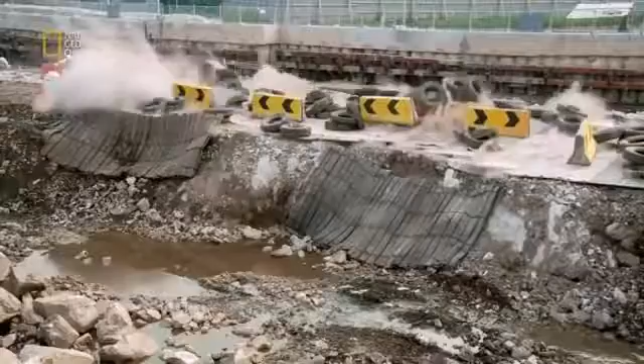Now there's an ambitious solution. A new transit system that will crisscross not only the city, but the entire region of Greater Kuala Lumpur. Huge machines will bore into Kuala Lumpur's treacherous bedrock to carve out almost 20 kilometers of tunnel.

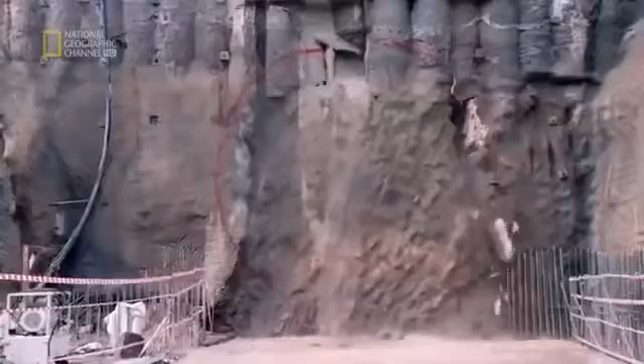Every day of construction, the engineers confront the perils of mechanical failure, fire, and collapse. Get it wrong and billions of dollars of investment could go to waste, and the streets of Kuala Lumpur and its pent-up economy will stay trapped in gridlock.

Kuala Lumpur is one of Asia's most vibrant cities. It's looking to compete with the region's Asian tiger economies. Its magnificent skyline testifies to its soaring ambition. But at street level, it's a different story. The city is blighted by severe congestion that threatens its future growth.

Over 7 million people live and work in the Kuala Lumpur region, the Klang Valley. Every day, they head into town in 4 million cars. As an alternative, a light rail transit system was built. But over time, it has been overwhelmed, and connections are inadequate.

Now there's a solution, a new mass rapid transit system that will reduce the pressure on traffic and unite far-flung parts of the city. For any modern metropolis to be vibrant, to be competitive, to be on par with some of the leading cities in the world, you've got to have a modern public transport system.

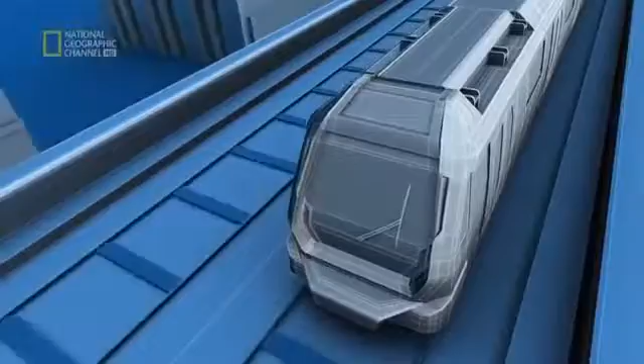The Klang Valley Mass Rapid Transit System, the KVMRT, is Kuala Lumpur's bid for greatness. 3 different routes comprising more than 150 kilometers of brand new lines. It will be seamless travel around the Klang Valley, especially the areas of high concentration population. And the first stage of the plan is the biggest test of all.

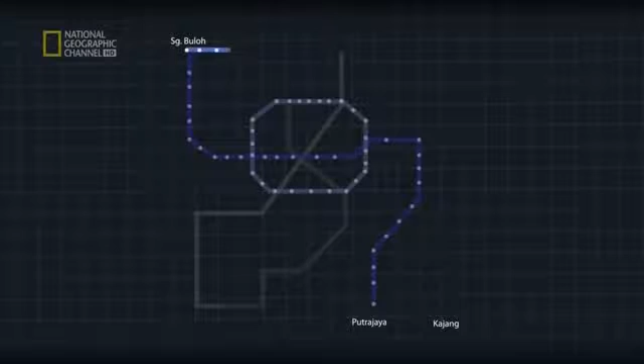This is the Sungai Buloh Kajang line. It will stretch 51 kilometers with 31 new stations. And a fifth of the new line will have to be constructed underground. To do this, 10 giant tunnel boring machines, or TBMs, will be brought to Kuala Lumpur and set to work.

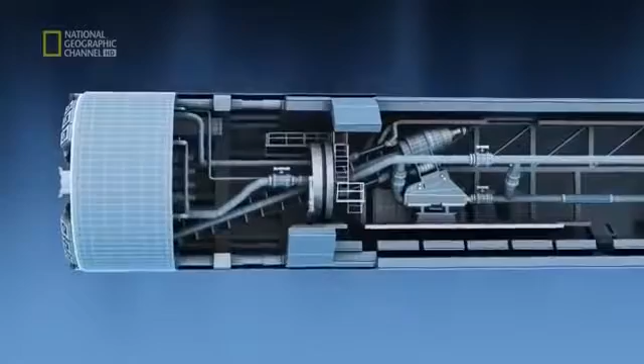These mighty engines do much more than burrow through rock, astonishing though that process is. As the huge drill crunches forward, the back end constructs the tough tunnel frame with high-strength concrete. In charge of this massive operation is engineering veteran Satpal Bogal.

Most cities now, for railway mass transit systems, the tunnels are built using TBMs because of safety issues and because of ground conditions. The underground section of the new MRT will be a perilous undertaking. For beneath Kuala Lumpur is a formidable engineering challenge.

I got this Dutch Edam cheese here. As you can see, this whole piece of cheese is fairly homogeneous, very tight. And Kenny Hill, when it's bedded, it looks something like this. This is like the KL limestone. All right, this is Swiss cheese.

As you can see, there are a lot of cavities and voids inside the cheese. These voids can be transmitted all the way to the other side of the cheese. Things can move in from one hole to another hole, and it may come in vertically and go out laterally. The most formidable challenge lies beneath the eastern areas of Kuala Lumpur, which rest on a huge slab of limestone.

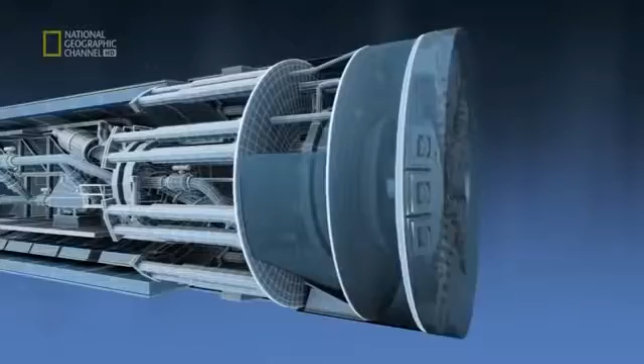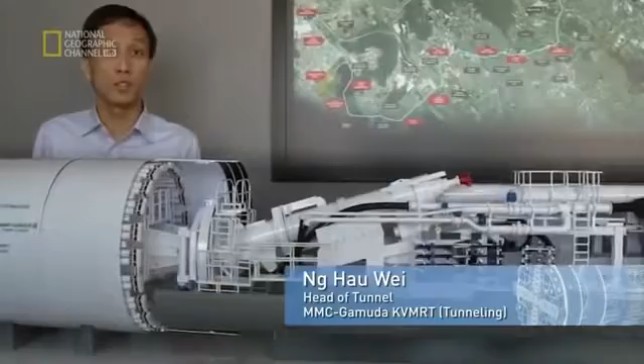This ingenious system was used by the engineers who built the Smart Tunnel in Kuala Lumpur, the world's first combined storm and traffic tunnel. But builders learned some hard lessons about slurry. Ng Hau Wei was a rookie engineer on this project. We have the best machines in the world in the SMART project, but we still do have some problems. We just couldn't control the slurry and it easily escapes to the surface, creating sinkholes.

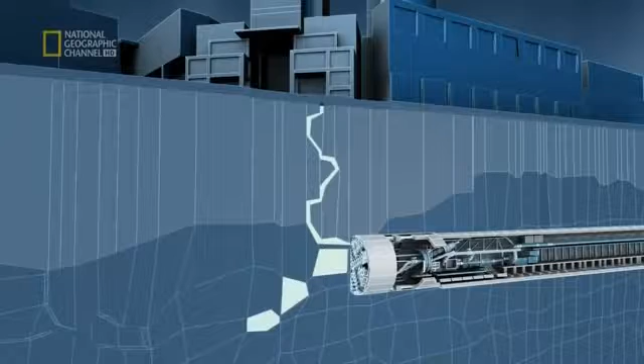What Ng and the engineering team found, to their cost, was that the slurry they injected into the limestone cavities could escape into surrounding rocks and cause havoc, bursting from the ground like a geyser or creating sinkholes at the surface that might suck in people, cars, or buildings. Today, Ng heads the tunnel team building Kuala Lumpur's MRT system. And this time, he had to find a solution to the uncontrollable slurry problem.

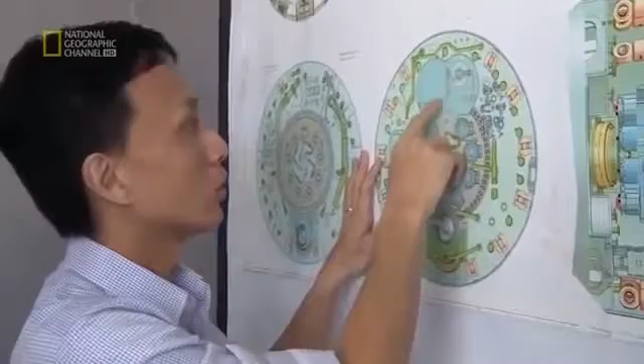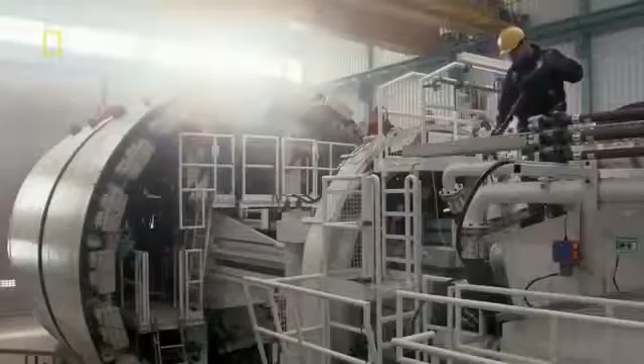Working with German company Herrenknecht, Ng and the team of engineers have come up with a revolutionary kind of machine. We throw in all the ideas, we have brainstorming sessions, we consult a lot of experts, we have to do a lot of research because no machine has been designed like this before. From these brainstorming sessions was born this mighty machine. Called the Variable Density Machine, it's the state-of-the-art tunneler. For the first time, a TBM can control the consistency of the slurry and take on whatever Kuala Lumpur's underground throws at it. Even the construction of this revolutionary machine is on an epic scale.

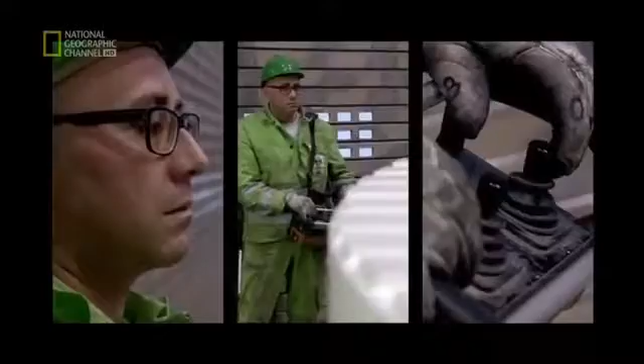Components are brought from all over Europe to be assembled inside the massive factory in Schwanau in Germany and other Herrenknecht plants in China. One machine like this is fiddled together with about 40,000 pieces one by one. The design starts screw by screw, piece by piece, and this is brought together with all our 400 engineers. They do all these works to come to this level, what you can see today. It takes 9 months to manufacture the revolutionary TBM.

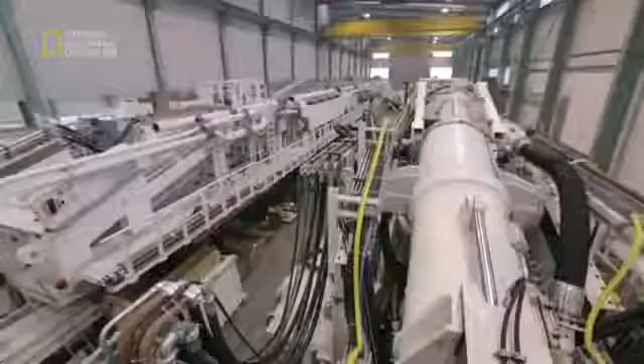Today, it's ready to be put through its paces. We have only seen it on the drawing board so far. So this is the first time that it is all put together. Everything is running, so we can check every equipment, including the cutter head, the hydraulics, the safety features. This is the last chance for us to make final modifications before we send it to the site and put it in the ground.

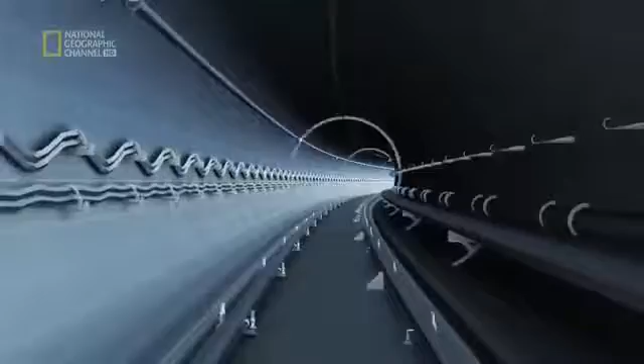As the engineers work on the TBMs in Germany, work gets underway in Kuala Lumpur. The engineering company in charge of tunneling, MMC Gamuda KVM-RT, must complete the job in 24 months and with minimum disruption to the city above. The operation is conceived on a military scale and with military precision.

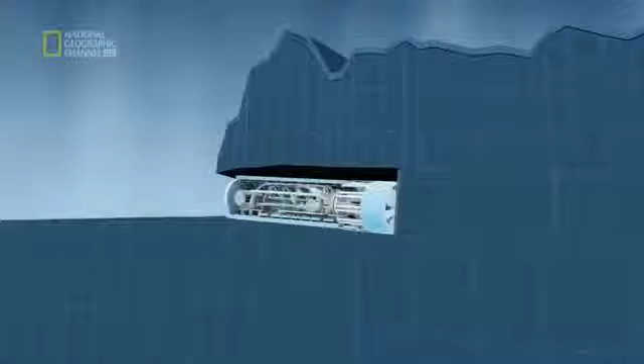The TBMs will be launched from 4 different staging zones along the planned route of the underground section of the MRT. At the western end of the tunnel, the elevated section of the MRT begins its descent underground from the surface. But at the 3 other zones, shafts must be excavated so that the different TBMs can be put to work beneath the city. Eventually, the different sections of the 9.5-kilometer tunnel must all link together.

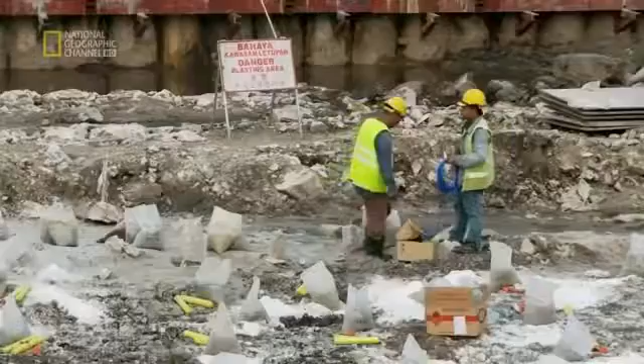Since July 2011, work on Kuala Lumpur's new MRT starts here at the Cochrane site. It must be dug out to a depth of 30 meters before 4 TBMs can be deployed. The huge staging zones will be blasted out of the ground. We have short time to meet our requirements, so we are working with frequent blasts, more than 2 or 3 blasts a day.

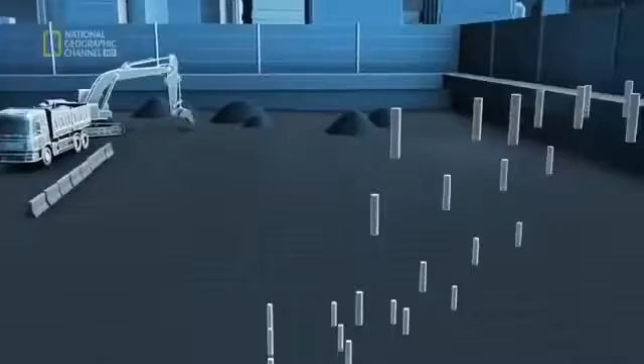The blasting must be carried out with rigorous precision, especially in a city as dense as Kuala Lumpur. When you talk of blasting itself, it's dangerous. You can see we've been surrounded by high-rise buildings. Now at the moment you're using about 150 to 200 kg. So that can bring a 10-story building down. The solution is to sequence each blast, creating a pressure wave that, in theory, won't damage surrounding buildings.

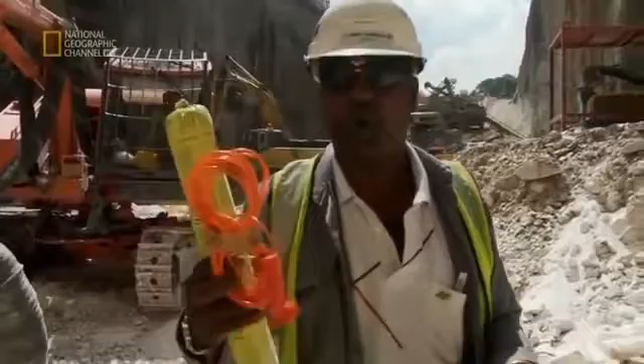These are the basic things we use. My hand now is explosive, which will be charged to the detonators over here, and it will be connected one at a time, and finally we have delays. This will segregate the blasting rather than at one go.

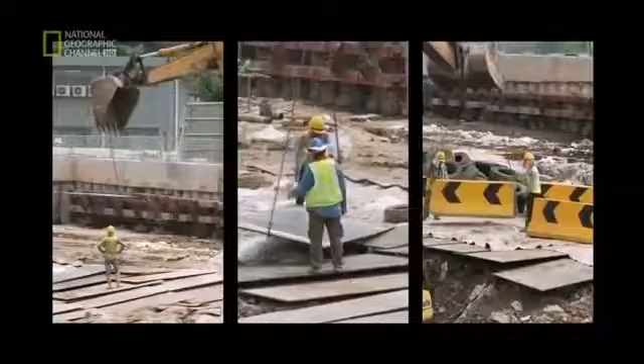Engineers dig rows of holes between 3 to 6 meters deep. Then the explosive charge is inserted inside with a detonator. These are connected to a central command point. But nothing is left to chance. Giant barriers of steel plates, truck tires, and concrete prevent debris flying from the site. The charge is set.

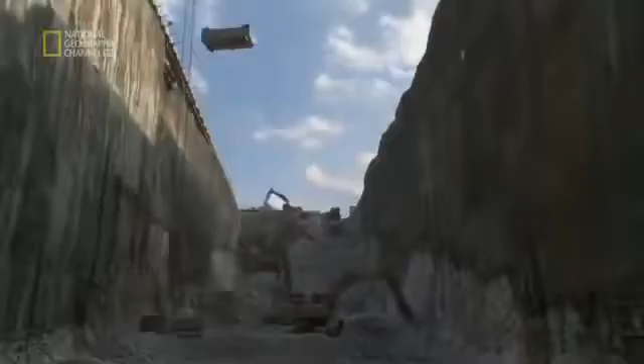The engineers have got the right formula, and the surrounding buildings are safe. The blasting continues at the Cochrane site for 7 explosive months. Enough rock and soil to fill 50 Olympic-sized swimming pools is blown out of the ground. And finally, the site is ready to receive the first TBM.

Its code name is 774. At the beginning of 2013, the first new model arrives in Kuala Lumpur. The giant machine is transported in parts to the Cochrane site on huge lorries.

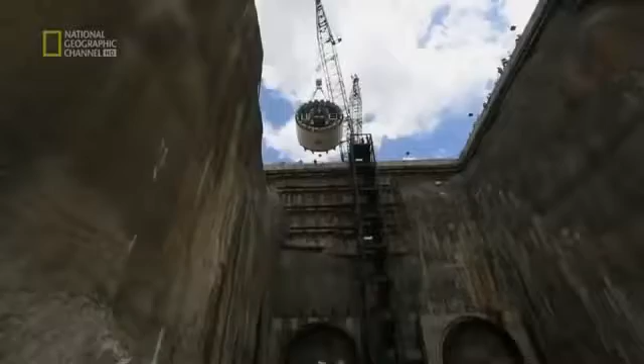But that's the simple part. Now, the 160-ton monster must be lowered into the excavated shaft so they can start chewing into bedrock. To lift it 30 meters down the shaft, we have to be very careful. Anything can go wrong and then we are stuck. It will push back the whole project completion by a lot.

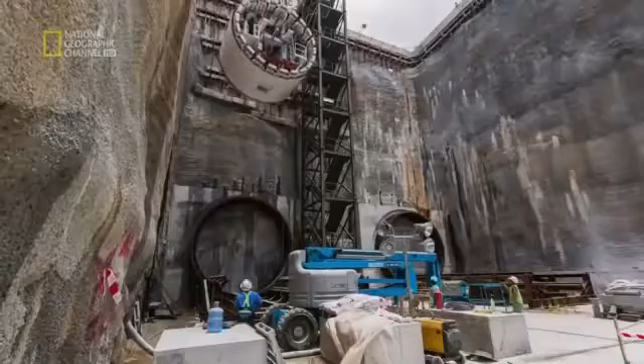At the site, everyone is holding their breath as the TBM begins its descent underground. Malaysia's capital, Kuala Lumpur, is being transformed into a huge building site. A new MRT system is under construction. Close to 10 kilometers will be built beneath the city, and a revolutionary new tunnel boring machine, or TBM, is brought from Germany. The first to be sent into action weighs 160 tons and has to be delicately lowered 30 meters to the tunnel entrance.

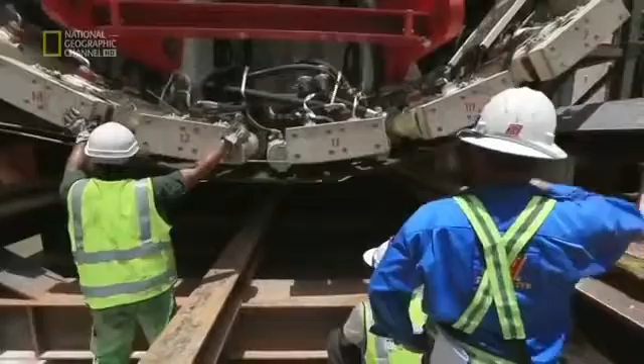The man in charge of the tunnel operation is Ng Hao Wei. He won his spurs building Kuala Lumpur's famous smart tunnel. We are dealing with very delicate components. We cannot afford to damage it. If the extent of damage is huge, then the impact to the project will be tremendous.

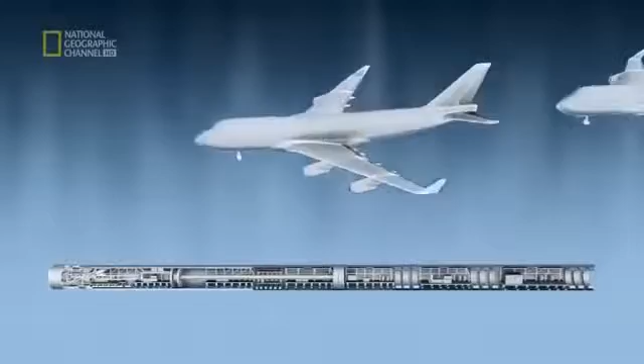This is literally the cutting edge, the business end of the huge machine. The circular cutter head weighs 70 tons with 37 tungsten carbide cutting discs, which are stiffer than steel and denser than titanium. The entire TBM is 135 meters long, almost double the length of a 747 jet airliner. Each TBM has 10 interconnected gantries to support the operation.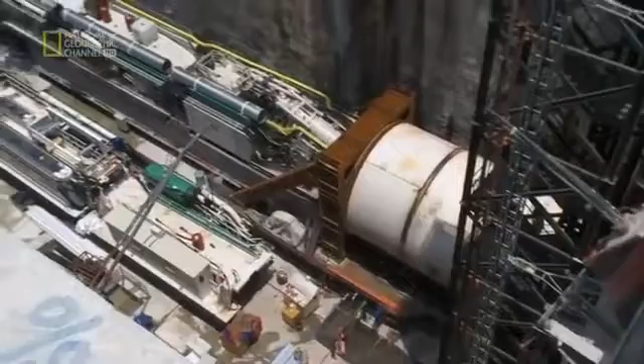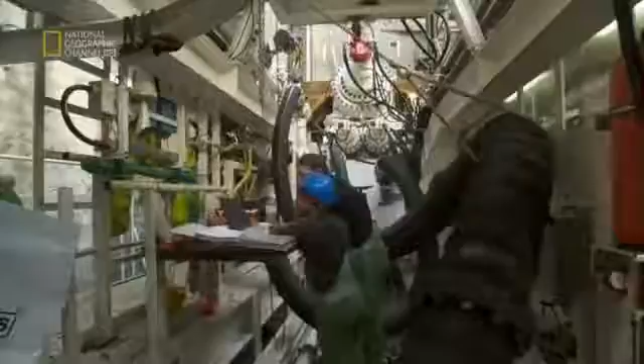Only 3/4 of the shaft has so far been excavated, so the monster machine has to be assembled in sections. We assemble up to the 6th gantry, which gives us the key components of hydraulics and electrics, so we can start to launch the machine, while at the same time giving sufficient space for the shaft excavation to go on. It takes just under 3 months for the TBM to be assembled.

The Prime Minister of Malaysia launches the very first variable density TBM. It's actually a technological marvel. And it goes to show that, in partnership with a German company, Malaysians can offer a lot of our technical guidance and advice. This is something that we can be really proud of.

One day later, Ng Hao Wei and his mentor Gustav Klados arrive to check on the machine's progress. Gus, a veteran Hungarian tunneler, has worked on some of the biggest tunneling projects in the world, including the Channel Tunnel linking Britain and France, and the Smart Tunnel here in Kuala Lumpur.

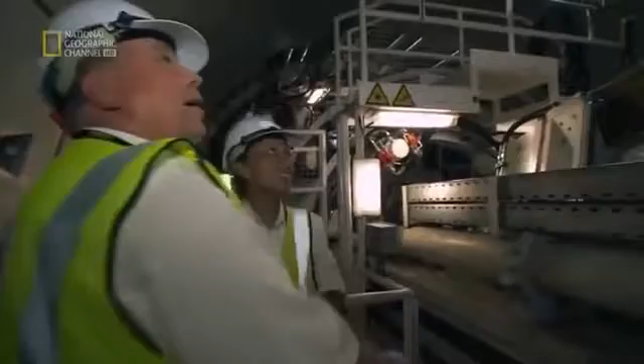This tunnel warrior is the team's project manager and is thrilled to be working back in the city on the new machine. It's uncharted territory. We are trying out something totally new. A lot of people at the beginning said it won't work, but now it is excavating. You can hear the stones moving around in the pipe, so it's a fantastic noise. It's my favorite. Much better than in the office.

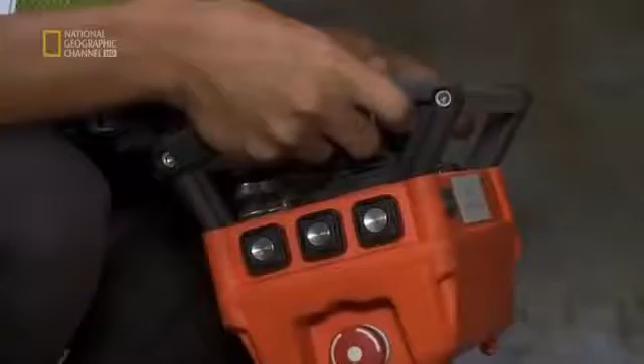It's not just the machines that will need breaking in. The giant TBMs must be served by an army of workers, day and night, week after week, month after month. I'm new here, but I try to make my best every day. Everybody starts as new. Trust me, I did start as a new guy. My first job was to go and count the number of nails and bolts and nuts in the stores, and I went there and literally counted them for a week. When I finished, I went to the storekeeper and he told me that we usually use a scale.

The MRT tunneling project will need thousands of workers over the 2-year period of construction, and MMC Gamuda set up an academy to train the hundreds of workers needed to finish the tunnel on time.

Veteran or newcomer, the team faces a daily avalanche of problems, and right now the problem is pretty basic: the TBM is just not picking up speed. 8 millimeters a minute, not very fast. Yeah, but it's all right.

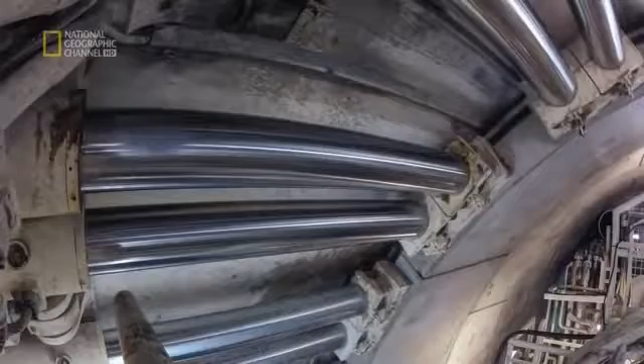At this pace of tunneling, the project will take 4 years longer than expected and run millions of dollars over budget.

But veteran engineer Gus Klados hopes that the giant machine will soon pick up speed. In the next few months, it is just to sort of break in the machine like a horse which has never been ridden before, and I am convinced that we will make it work.

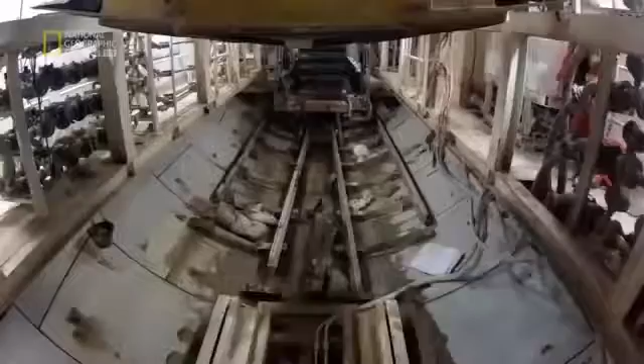The team is under pressure to complete the tunneling works on time. In the tunnels, the TBMs never stop mining. It's a 24-hour operation, and 3 weeks since mining began, the giant machine has at last picked up speed.

The TBM is like a huge underground factory, drilling, building, and spewing out waste. The heart of the entire operation is in this tiny space.

So what's happening? Pressure sensor number 4, broken wire. The control cabin means the heart, the control center, the heart of the TBM where everything is controlled.

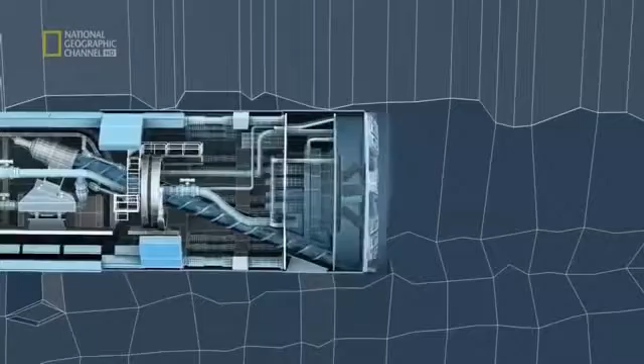If you're building a skyscraper, visibility is not normally a problem, but underground it's a different story. You can't see through rock. So to give the TBM underground eyes, the machine is equipped with arrays of sophisticated sensors.

It's like when you are working in a submarine. You have to depend on the sensors, you have to depend on communications, you have to depend on eyes. Other than yourself, you can't see anything.

Inside the control cabin, engineers can work out with absolute precision the real-time position of the TBM, calculate changes of direction, and when to start lining the tunnel wall.

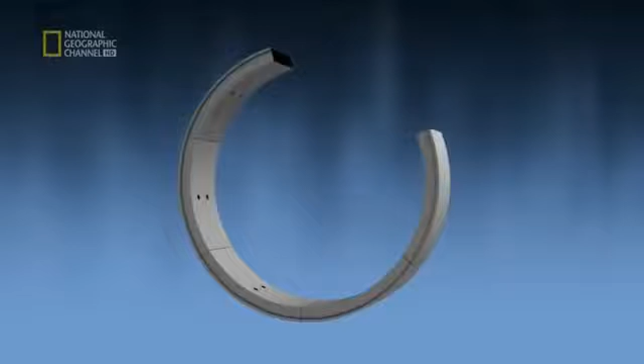After mining about 1.4 meters, we will build the segments piece by piece and then build them up like a jigsaw puzzle. These tunnel rings are made from 7 segments plus 1 keystone that holds everything together.

The concrete wall segments can withstand extreme pressure, 30 meters underground. All day long, concrete segments arrive at the TBM. Each segment weighs 2.2 metric tons.

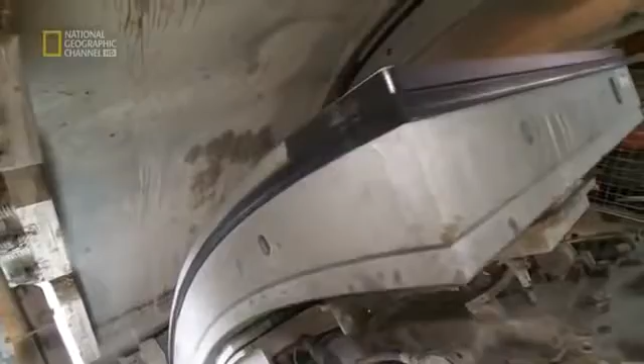Giant hydraulic arms swing the segments into place using the TBM's vacuum erector, which uses the power of suction to raise and position each segment.

Precision is essential. If any one of these segments are wrongly positioned, the consequences would be catastrophic. So it's very important to drum into the ring building team that they have to build it to the required tolerance of a few millimeters deviation.

If we are out from tolerance, the water will find its way to seep through, and we'll have a great problem to seal it up.

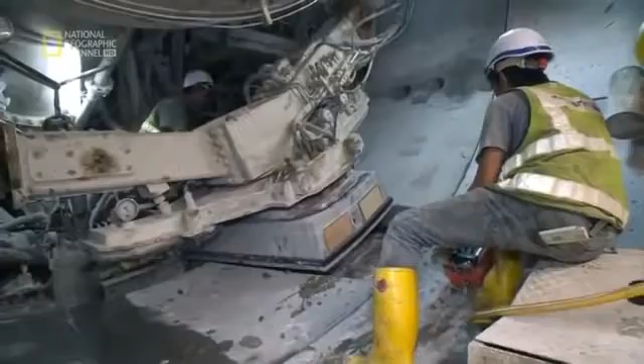Over time, as graduates of the Tunnelling Training Academy get more experience, the process builds up momentum. In the first week, the teams managed to place just 3 rings a day. 3 months in, and the rate is 5 times higher.

The campaign to excavate Kuala Lumpur's new MRT tunnels is about to enter a more intense phase. By November 2013, 4 TBMs have been successfully launched from the Cochrane site.

But at another launch site near Inai Road, the engineers have run into difficulties. Here, 2 circular shafts are being excavated to 30 and 45 meters in depth. But as the shafts are blasted out of the ground, disaster strikes.

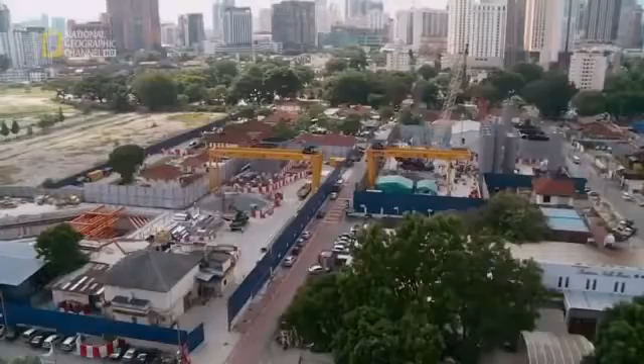The hole in the garden is frightening enough, but the condition of Mr. Jamal's home is even more alarming. Floors dip and cracks ripple up walls and across ceilings. The family home is falling apart.

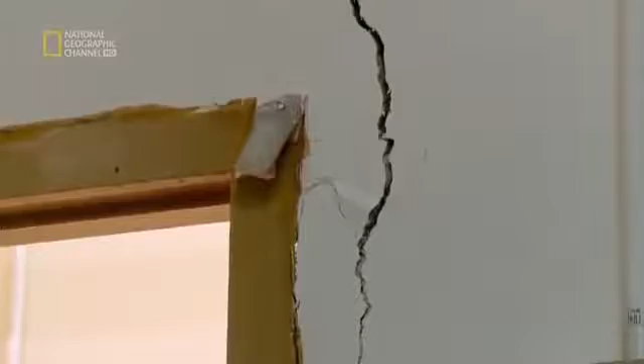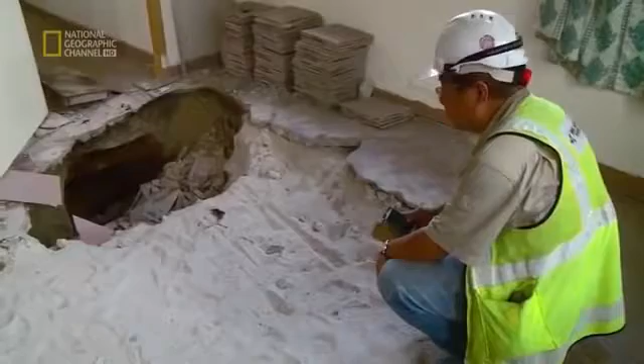Terrified, Mr. Jamal calls the company in charge of the MRT project. When inspectors see the condition of his home, they make an immediate decision to move the family out. Engineers now need to explain what has gone wrong and whether other homes are at risk.

In limestone, what happened is that the solution features can be connected laterally and vertically. What happened is we drill a shaft, so this hits a connection. When there's a hole, it's like a pipe culvert.

If you have a culvert connecting from the shaft to underneath Mr. Jamal's house, that forms a very easy flow passage of water, bringing the soil from underneath Jamal's house into the shaft. And that results in sinkholes.

And it's not only Mr. Jamal's house that's in danger. Water is pouring in from the walls in the deeper of the 2 Inai shafts.

It's unstoppable, and the situation is a tough call for project director Satpal Bogal. We couldn't stem it, and the decision was taken to backfill it for safety. That decision then followed on to other changes to the program.

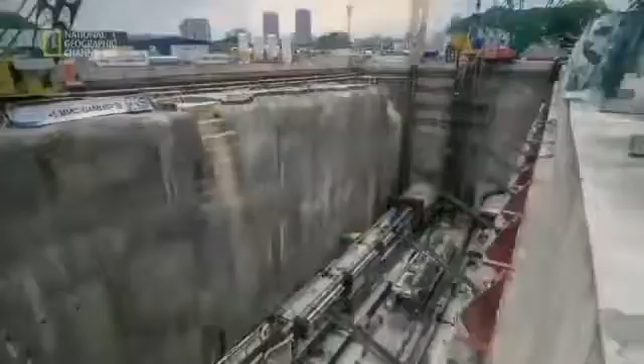Abandoning one of the two Inai shafts is a huge setback. Now only one TBM can be launched from here, meaning a new strategy has to be devised. The first TBM brought to Malaysia, 774, which has been mining from the Cochrane site, must now make up the difference and tunnel more than twice the distance. It will put the complex machine under severe strain.

It's not only flooding that makes the Inai launch site such a headache for the engineers, it's also a very tight fit compared to the other launch sites.

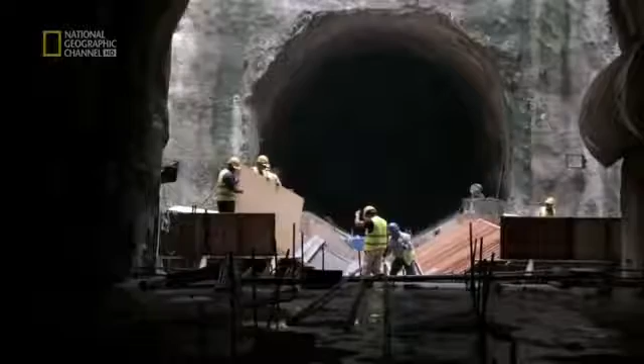Tunnel engineer Aslan Marzuki is in charge of getting the huge TBM to the bottom of the shaft. It's a smaller shaft, not a square but a circle. That saves space, but it means our launching is going to be staggered.

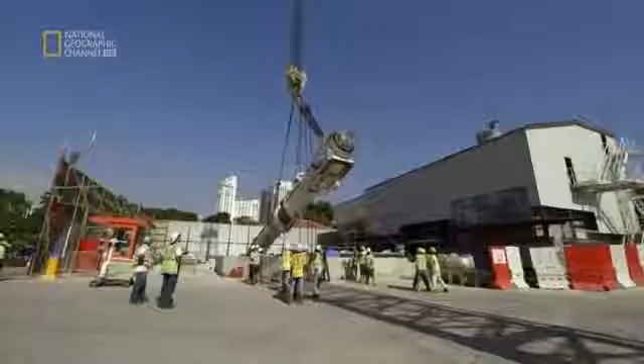The team will blast out tunnels on both sides of the shaft, then the front section of the TBM is inserted. Next, three of the ten gantries will be lowered one by one, followed by the giant screw. The problem is that the 18-meter screw segment is wider than the width of the shaft.

Behind me, this is our biggest component that's going to be lowered down. It's the most difficult one because this length is actually bigger than the shaft itself.

The solution is simple, but risky. The screw segment of the TBM will have to be lowered into the shaft at an angle. We have to tilt the screw conveyor at a 36 degree angle, using a chain block and a hand winch to pull the machine upwards. It sounds simple, but that giant screw weighs a whopping 15 tons, and any deviation from that critical 36 degrees would be catastrophic.

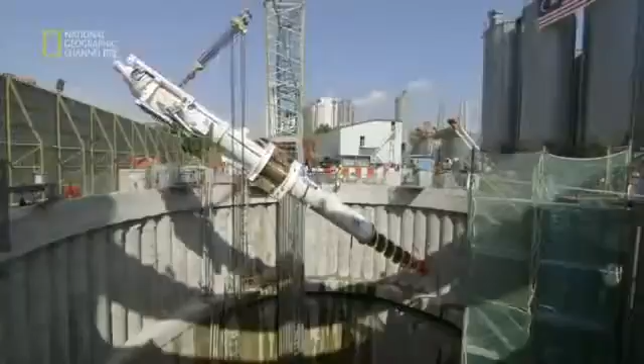At the bottom of the shaft, the engineers face another challenge: the angle of descent has to be lowered. It's another fiddly maneuver with a lot of complicated machinery at stake. When you lower it down, the final angle is 15 degrees. Down there, you still have to do the same exercise again, but it has to be a slow process. After two hours, the screw conveyor is finally in place.

It takes three months of hard slog to put the TBM together, but at last it can begin burrowing into the limestone. This underworld is packed with hidden dangers. Like Swiss cheese, the rock is riddled with cavities that could wreck the multi-million-dollar boring machine.

When you're tunneling this way and you have a cave directly underneath your cutter, and it's big enough that you cannot develop a face support, the thing just dips inside. In that situation, then we are snookered. It will take us months to recover, or to bring that TBM cutter face into operations again.

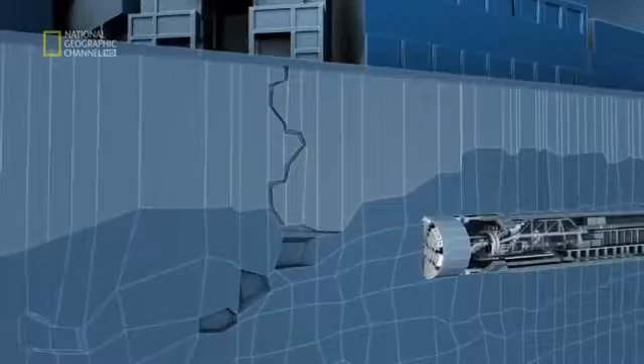As the huge drill edges forward at 14 meters a day, an army of engineers is busy scouting the perils that lie ahead. They drill hundreds of boreholes into the layers of rock. Once a cavity is detected, concrete is poured into the hole to shore it up, a process called grouting.

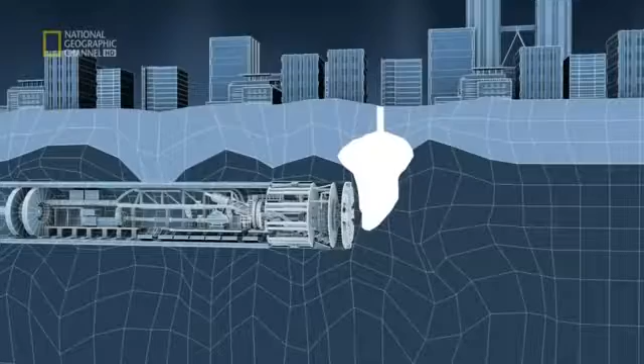If we do encounter such a thing, then we'll do a lot of compaction grouting to fill up this void, like you go to a dentist to fill up your cavity, to ensure that when we are tunneling through, the TBM can go through safely.

But some cavities can be less than a meter wide. These are much harder to fill, but still pose a threat. There's no way we can pick it up. We are unable to treat all these features along our tunnel alignment. So what we then need is a machine that can cater for all these little challenges.

Enter the new breed of tunnel boring machines. Behind the drill, a sealed high-pressure chamber is pumped full of liquid called bentonite slurry. Unlike previous models, the new TBMs can control the density of this thick gray liquid, changing the consistency from a thin watery liquid to a thicker honey-like substance. The thicker slurry is used to fill these hidden cavities, and its density prevents it escaping through the porous rock to the surface.

The machine is able to operate at different modes at the flip of a button or some switches. So by doing that, in situations where we have major loss of slurry into here, we can then switch to a thicker density. It's kind of a little paste that chokes up this one, and then we can mine through very easily. The revolutionary new tunneling system soon proves to be a success.

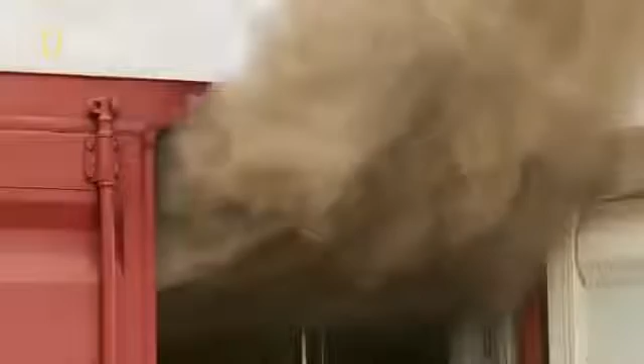Tunnel fires can reach temperatures above 800 degrees Celsius, and in a tunnel, there's nowhere to run. When we see upside down boiling pot of soup, like angry, those gases are going to ignite. All firefighters dread a moment they call flashover. It's when a blaze turns into an inferno. And a flashover means get out now. We gotta go!

The exercise proves too challenging for some. Extremely hot, like being in a torture chamber. But it was good. Very, very good experience. It was dark, it was hot. It's very hard to describe, but you have to be able to keep a cool and calm mind. And they know what to expect. They're better than they were before. Yep. So we're good.

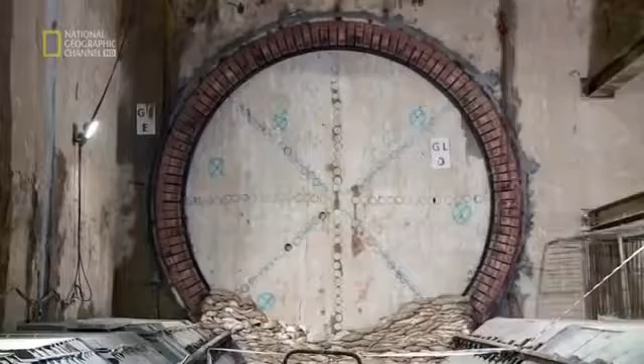Christmas Eve, 2013, and the MRT engineers have cause to celebrate. One section of the tunnel, where the MRT line dives underground at Semantan to the Museum Negara station, has been completed. It's the project's first breakthrough, and at any moment the TBM drill head will emerge from this tunnel. It's an anxious wait for tunnel manager Chin Raymond. I told him if it doesn't come in the middle, I have to jump off a cliff somewhere. After drilling for 6 months, the TBM punches through right on target.

Congratulations. Thank you. Well done, man. Okay. Good. Yes, great. Finally, I pushed my machine, came in. I've been working for more than 24 hours. I can have a good rest to enjoy my Christmas.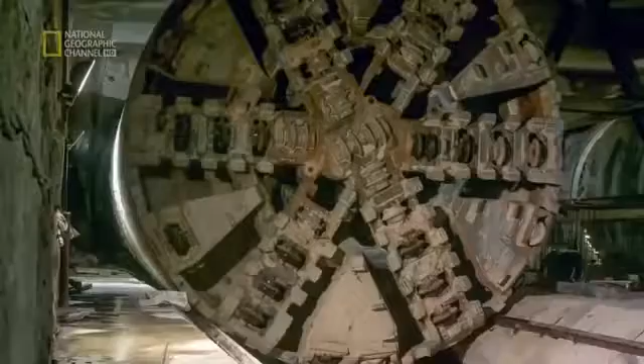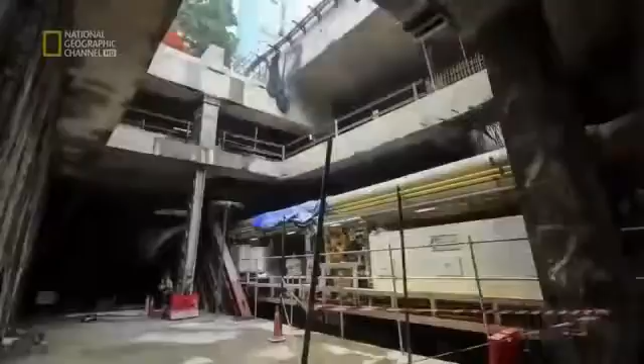But the machines don't get a holiday. As soon as the TBM completes its breakthrough, it is hauled into position to begin work on the tunnel that will link Museum Negara to the next station. The TBM is now burrowing beneath the historical heart of Kuala Lumpur. The Museum Negara is a repository of the nation's history and culture. Its facade is lined with precious mosaics.

Further along the path of the excavation is the old railway station, an icon of the past that stood the test of time. But can it withstand the mighty TBMs as they thread their way nearby? We were stuck with having to cross under some sensitive structures, and the ground settlement would affect the existing structures. If there's too much ground settlement, the buildings could collapse.

For the old building, actually, we had to pay much more extra care because we don't know how good is the structure, don't know how good is this building foundation. So we had to pay extra precaution on that. A team of surveyors now equip these venerable buildings with highly sensitive sensors that monitor every vibration.

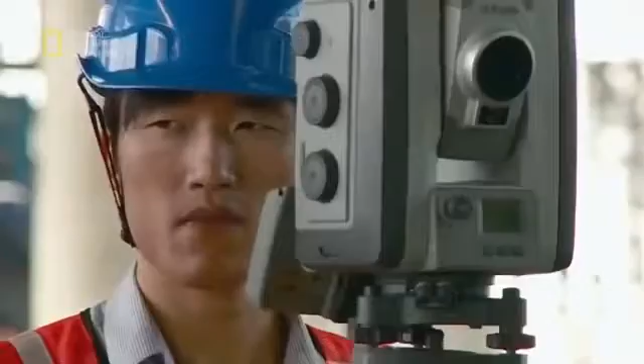As the TBM approaches, Tae Chi Yong and his team of surveyors nervously carry out hourly tests to monitor the old buildings. The TBM is below this building directly. You get to monitor the effects and the impact of our TBM drive on the structures above, on the surface above. It's a nail-biting 5 months of constant monitoring as the TBMs negotiate this historic region. And at last, the TBMs inch past. The iconic buildings are safe.

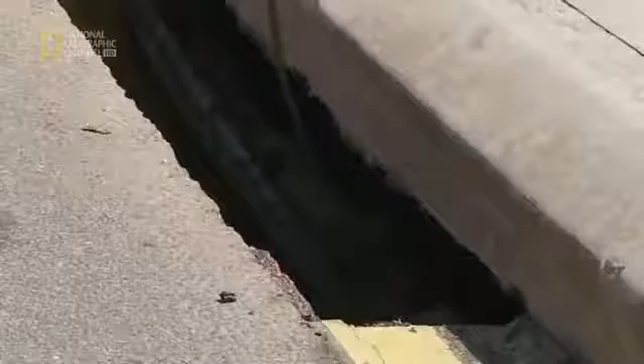While the people of Kuala Lumpur get used to living and working in a massive work site, where giant boring machines gnaw away at the city's bedrock to build a new MRT, the President of the United States will be descending on Malaysia in 3 days' time. But all is not well with TBM 774. Located less than 400 meters from Obama's planned accommodation, the TBM gets a bad case of indigestion and is unable to process the waste from the cutter head. It has come to a halt.

Directly above the TBM, a team is tasked with monitoring road surfaces to look for any signs of trouble. Called the Bull Gang, it is led by Michael Poon. We have a team of people patrolling 24 hours. We have to check on the surface. This morning I walked by, I saw some settlement. It's just a small depression. I can see the hole. It's quite deep. At the surface, the cracks don't seem to pose much of a threat. But like icebergs, most of the danger is hidden. Down there is a void big enough to fit an electric car.

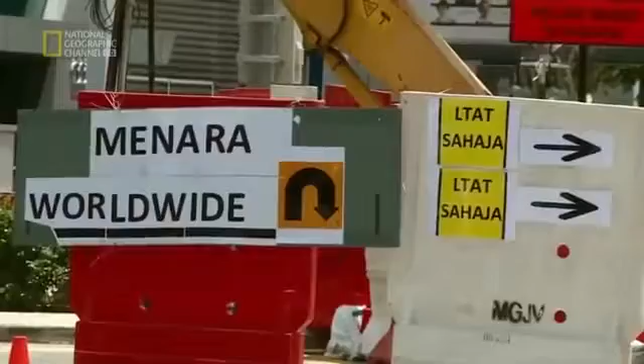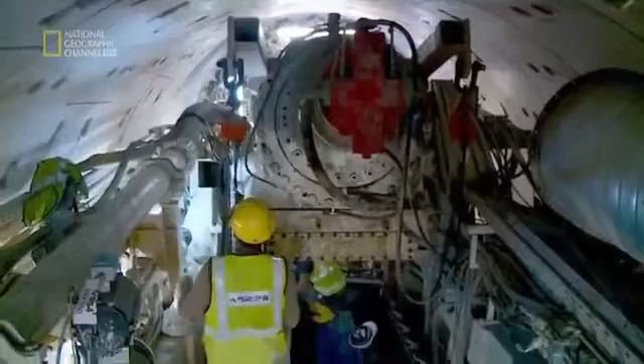We have an unscheduled stop. They have to lower all the slurry. That means the face support is affected, and that causes a depression or a sinkhole in front of the cutter face. An emergency response team reacts immediately. The road is closed to traffic. Then we decide to order mortar to fill up the hole. The hole is quickly filled with 5 cement trucks of concrete, and frantic repair works continue inside TBM 774.

Across town, there is reason to celebrate. The 5th breakthrough of the project will take place today. It's a landmark moment. It means that 50% of the tunnel has been completed. Well, every breakthrough is like a landing on a plane, right? Once you're there, you feel great because you brought home the TBM.

The breakthrough, I thought it was very exciting. Now we finished everything. It's very, very good. I'm very content with the progress as well. The quality of the tunnel linings that we have in the precast concrete inside is one of the best. We work as a team. We work night and day, blood and sweat, hard time, good time. This is the prize for all the crew. This is like a present.

But the celebrations are short-lived. As TBM 774 finally starts mining again, President Obama arrives in Kuala Lumpur. But to the horror of the team, another collapse occurs just meters away from the earlier sinkhole as the president is at the official state dinner. This new sinkhole is an even bigger problem than the previous one. Ground movement has broken water pipes, and the hole is filled with live power cables.

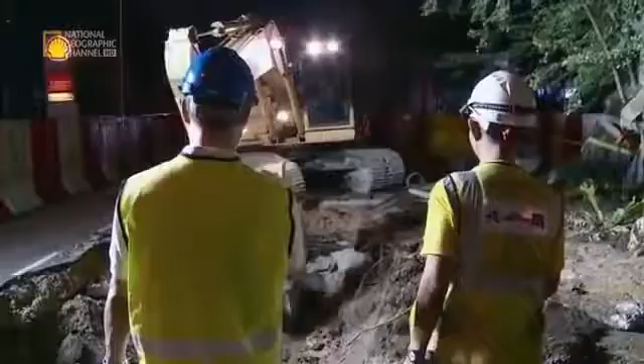President Obama is living nearby. We definitely would not want to cut off water and power to where Mr. Obama is living, obviously. So we're trying to get this done in the quickest time possible. Racing against time, the Bull Gang takes 5 hours to repair water pipes and fill the hole. As they work into the night, President Obama and his entourage are blissfully unaware of the battle that is being fought less than 400 meters from their hotel.

TBM 774 is now approaching the zone where the underground geology changes from the karstic limestone to the Kenny Hill Formation, from Swiss cheese to Edam. We are going through a very distinct change in ground condition. In normal cases, you will need to use 2 different types of machines, and you will need to have another launch shaft to do this. It will take months. But the new variable density TBMs can be retooled underground.

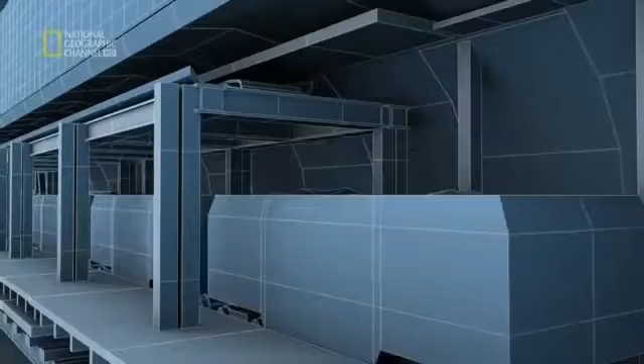It's a matter of changing the way waste is extracted. Instead of extracting through pipes, it needs to be removed with a system of conveyor belts right to the end of the gantries onto these so-called muck cars. The conversion takes 1 week to complete, but it's a much smoother process than the older system.

But a much bigger hurdle awaits the TBM 774, an underground tangle of steel wires that could bring the TBM to a standstill. 30 meters beneath Kuala Lumpur's nightlife hotspot, Bukit Bintang, engineers excavating the underground section of the city's new MRT encounter an unexpected obstacle. Contractors of a shopping mall adjoining the street have left steel wires known as ground anchors in place, and these are bang in the path of the TBM. Put into the ground as temporary supports for the basements, they could hold up work for months.

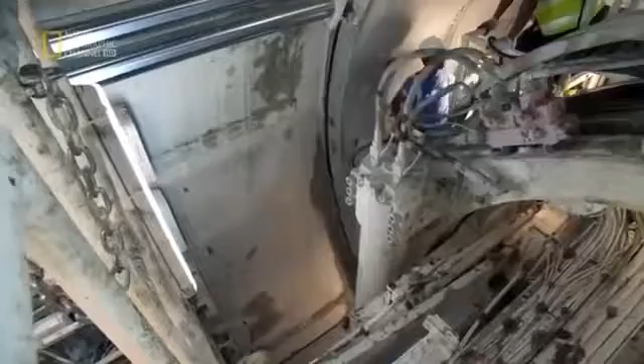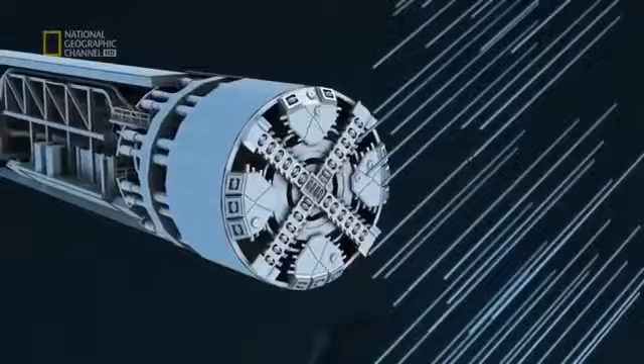It's very difficult to find them from the surface, and you cannot remove them from the basement anymore because the permanent walls are built, right? They are all covered. Since the steel wires cannot be extracted, a decision is made to push on through with the TBM. But there is a continuous risk that the drill head may become entangled and damaged in the wires.

It is the task of engineer Hugh Wei Hon to monitor the tunnel ahead. So in the morning, actually, we found some ground anchors dropped underneath the conveyor belt, and we decided to stop the TBM, look for the ground anchors, cut it and remove it. A team now has to enter the space around the cutter head at the front of the TBM. There's little space to maneuver, and temperatures are close to 40 degrees Celsius.

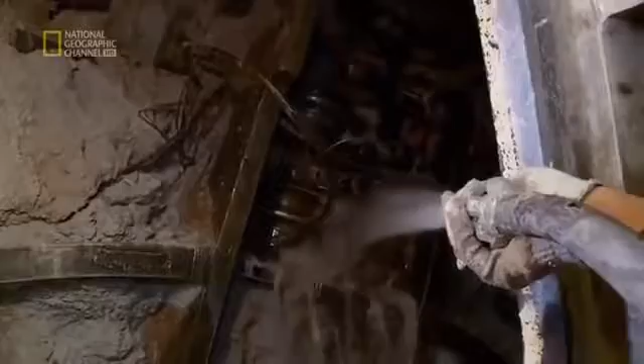To overcome this tangle, first, the team washes away earth from the cutter, exposing the snarl of steel wires caught in the cutter head. These must be cut away with an oxyacetylene torch. It's a laborious process. Every time they hit the ground anchors, the TBM halts as the wires are trimmed away. It takes 2 weeks to mine through this web, but it could have been worse.

If we had hit all the ground anchors that we expected, it would have delayed the project by about 3 to 4 months. And we were able to go down and cut these ropes so that they weren't stopping the cutter head from turning, and we carried on.

It's the final breakthrough. After 23 months of excavation, from tomorrow, the TBM will fall silent. The honor goes to TBM 774. This was the first TBM to be launched into the limestone labyrinth under Kuala Lumpur. It has burrowed its way through almost 5 torturous kilometers of rock and soil. Now it must make the final breakthrough.

It's a thrilling day for the engineers inside the giant machine. We are about to break through. We have about 400 mm left on the cut. Hopefully we'll get a successful breakthrough. What's happening now is we're cutting the D-wall, so that's basically the barrier between us and open air. So this is a very exciting moment for us. Any moment now, maybe within the next half an hour, we'll be out in the station.

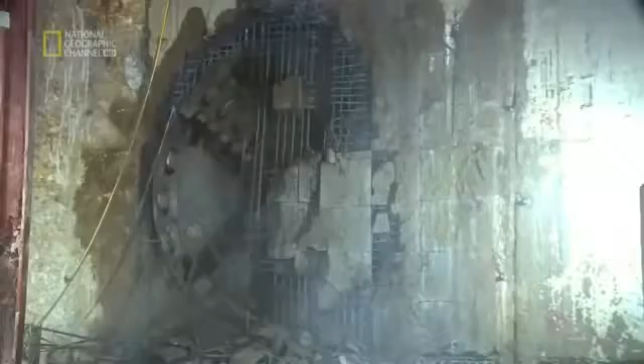This is actually the first TBM that we launched back in 2013. Just short of 2 years, we have done 5 kilometers of tunneling. This is a great day for me and for the whole team.

The last breakthrough is a landmark moment. Now the race is on to complete the stations and get the MRT running. Only then can Kuala Lumpur's clogged up traffic arteries become truly open for business. You're basically going to live in a modern metropolis of the 21st century. This is the new world that the people of Greater Kuala Lumpur can look forward to. A city seamlessly integrated by overground and underground MRT lines, linking together the city's heart and its far-flung suburbs, where today's gridlock is a distant memory.